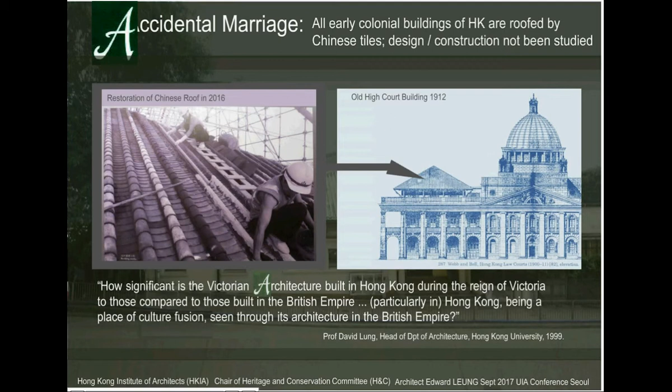As I come across more... yes? Can you define what's a Chinese roof? I am coming to that. I will come to that.

Chinese roof — okay, I'll jump to that. No, that will be the next slide.

When I come across more projects, these are some of the projects that I come across repairing. And look at this, the end tiles sagging. It doesn't happen on Chinese buildings, it doesn't happen on Western buildings, but it happens in Hong Kong a lot, over and over again.

Parapet wall, tiles clashing into it, no flashing. I wouldn't do it in England.

Isn't the point that in British architecture, they're only interested in the facades, the roofscape is really not so important? That is a very good point. The roofscape is all important. That is the central difference.

I will come to the different categories. What you said is one quarter of the question. I will categorize what Western architecture or Western buildings look at — when did they look at the roof, when did they not look at the roof, and what happens when they don't. When they do look at the roof, they look at the shape of the roof, or they look at the techniques of the roof.

So as I said in the beginning, I don't look at buildings at features — that is the layman way of doing it. The layman will bring you on a Hong Kong architecture center tour and say, oh, this building, blah, blah, blah. I never look at buildings like that. I look at it as, what happens if I were the architect 100 years ago? That's how I look at things.

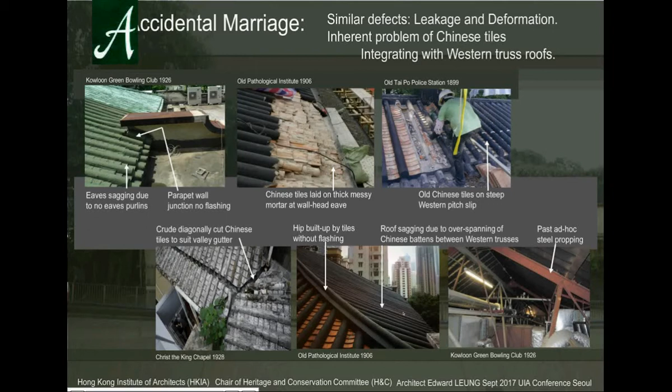Sagging on the roofs, okay? This is just lime mortar without any flashing. In Western architecture, we would put a bonnet tile or a bonnet flashing on top of it. It doesn't happen here, okay? And they sag. Also, the structure has got a problem, because the span does not match the necessary structure. I'm not talking about one building, time and again this happens. So I want to see, is there a rule to it? If we have to accept Hong Kong has these sort of things, why would some people do that? Can we think of some way to resolve it?

Okay, first of all, then we come to Payman's question: what defines a Chinese roof? I want to narrow it down because Chinese roof is such a gigantic topic, it will take me 10 years to do it. I will narrow it down to Lingnan roof. Lingnan being in the southeast coastal region of China, where Hong Kong, Guangdong province, Guangxi province and Fujian province are. What tiles do we use? I don't want to talk about North China tiles, that's a different story. So how do we, Hong Kong in particular, 100 years ago, integrate Chinese roof with Western building? How do we do it? Then, when we face with these things, what are the problems, and do we have good conservation techniques to deal with them?

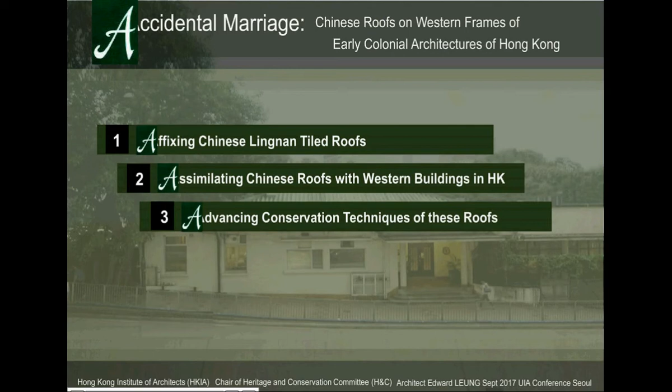Okay, Lingnan roofs, according to Professor Tong Gao Hwa, he cited 5 characteristics of Lingnan roof, which is very particular. One is that we are water shedding. We only need the tiles to, okay, come back to what defines Chinese roof. Chinese roof is defined as, obviously used by Chinese, but the way we do it is modular, concave and convex tiles, small units, very typical units, very few special typical units. That's how we do it. No matter in North China or South China or Eastern China or Western China, we use concave and convex tiles and interplay with it. This is from the scholarly studies of many scholars saying that the common characteristic is convex, concave tiles.

Okay, Western tiles do have typical tiles, but Western tiles also have a lot of non-standard ones which are used widely. They have a lot of bonnet tiles, ridge tiles, cap tiles, eave tiles, parapet tiles, and a lot of flashings. But Chinese tiles predominantly try to use one or two shapes and try to interplay it as many times as possible. Traditionally Chinese have done this very successfully.

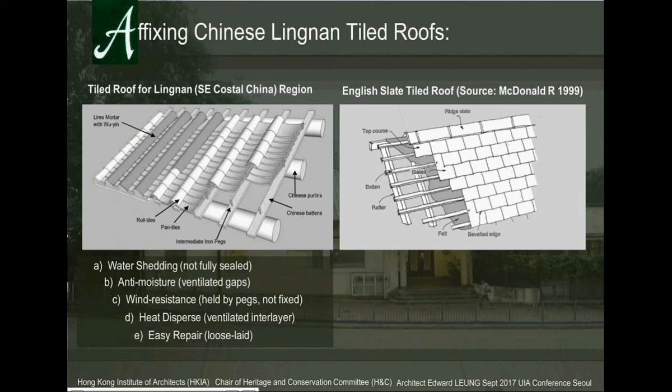As I said, Chinese roofs are something like that: purlins very close together, and very small, thin battens, done in a very gentle roof. Something like that. And the purlins are probably 400 or something apart, and because of the length of the tree, you can probably span 4 or 5 meters. The reason we do things like that is because all Chinese buildings enter on this side.

Chinese buildings will always enter on this side, on the eaves. Western buildings, you always enter on the gable side. That is why on the Chinese building, this does not matter, you can have as many wings as possible. Western buildings need that width because you face front. Chinese buildings don't matter even if you have a lot of columns in between, because it doesn't obstruct you, right?

So Western buildings would have a very strong truss, which is able to put very deep purlins and have very deep rafters, in exchange for very small battens. And that is why Western buildings could do it. Oh, I haven't got that drawing, but I'm trying.

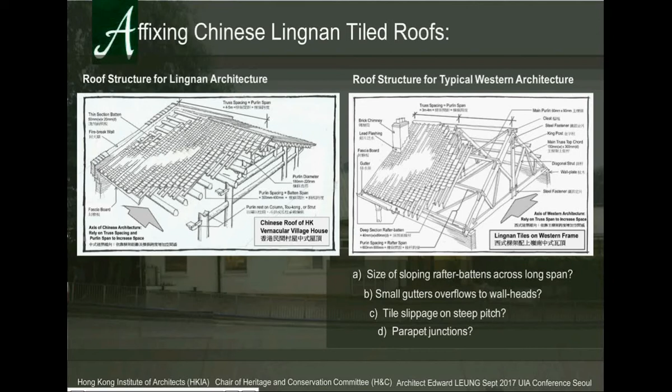This drawing is trying to put Chinese tiles onto there with very closely packed rafters. Obviously, that is expensive, right? I missed one drawing in between, which I've drawn but didn't show. It's with rafters apart, all Western buildings, which was the slide before. Something like that. I've drawn it as well, but I didn't show it.

So you can see the inherent problems of all these things, of how they try to integrate the two things together. But how does it happen? I want to step back a bit. How does it happen? I don't know. When does it happen? I don't know. Because the fact that I don't know is a good piece of information.

Nobody ever writes about it. The more I research on it, nobody ever talks about it. There are some in Shamien, traditional like that, very beautifully designed facade, but the roof is almost non-existent. You can't see it. This one I can see from another building above, and it's setback.

So it must be the same style. Although it's so simple, there's only 8 words in the entire document. This document is very elaborate on the windows and all the materials. Only 8 words about the roof.

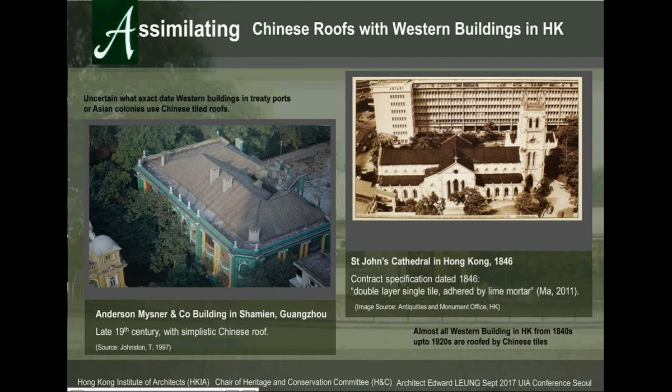It would mean that everybody was doing something like that, a very typical Lingnan double layer tiles roof. Got that? Okay, so I come to a stop on the history.

So I try to look at it differently. What if I were a builder at that time? What would I do? Instead of looking at the style of the building, I reverse it. What circumstances would drive me as a builder to build a Chinese roof on a Western building? I think of four reasons.

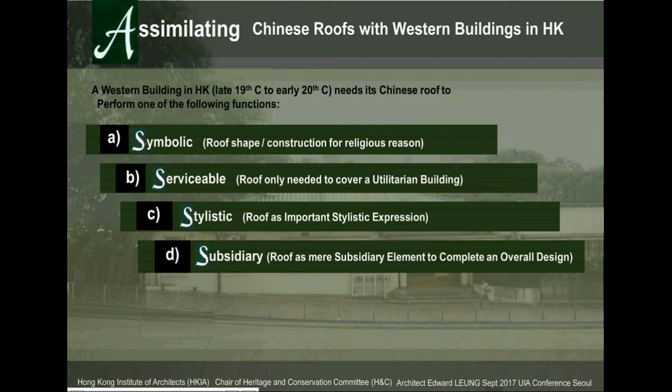One is symbolic, one is serviceability, one is stylistic, one is subsidiary. I'll come to that one by one. Symbolic, not by style, but by shape.

If you have a church, it is important to have a nave and aisles, and externally have a pitch roof. Even later, when you build with concrete, you still want a pitch roof. Somehow with a church, you would want a pitch roof both externally and internally. That is the reason, disregard the style. You can have it classical, like the First Church of Christ. You can have it Gothic, like some other churches. You can have it vernacular. Doesn't matter, always have a pitch roof on the outside and on the inside.

So when you do that, I'm focusing only on tiles, which are important. Later, by the 1920s, people began to use concrete, like Kau Yan Church in 2nd Street, so concrete roof with tiles. There are other churches like that, but I'm focusing on timber ones.

As I already said, the problem to solve with timber truss and Chinese tiles is the spacing of rafters and purlins. So in this case, what they opted for is a very deep rafter, very closely packed together, so that the purlins could be done as if it were a Western truss. It looks like a Western truss, but the rafters are very deep. That is an expensive way of doing it. Maybe the Rosary Parish Church was rich, so that's how they did it.

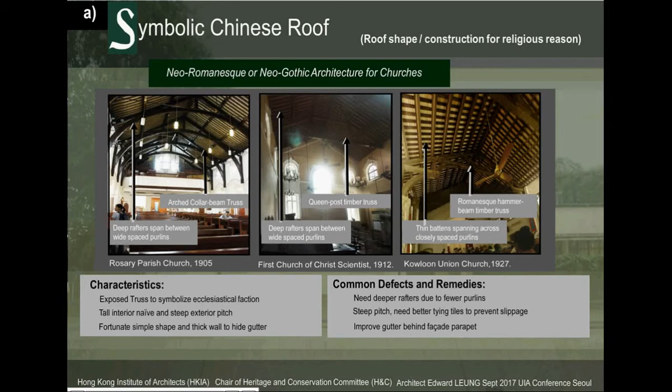You can never do a Western roof without compromise - you either have to pay for deeper purlins, more purlins, or deeper rafters. There's no alternative, no in between. The few cases I see with not very deep trusses and not a lot of purlins always sag. That's the problem.

Okay, the second reason why I would build something like that is utilitarian roofs. Some of them are purely utilitarian. Yes, you may have a facade, but when you have a utilitarian building, you're not particularly concerned about the facade, or you don't need a particularly beautiful interior roof. The pitch roof, Chinese pitch roof, is just for convenience. It's too difficult to make a flat roof, and it's impossible to have a Western slate tile roof because you don't ship Welsh slate to Hong Kong. So you get a roof like that.

But since it's utilitarian, you don't think about the eaves too much, and you just have a cornice eaves, and that's exactly where the problem is. They always overflow, because probably in England, where I come from, it's always drizzling for 360 days a year, but it's never torrential rain. But that is the norm in Hong Kong. So when you have gutters that look like that, you are asking for trouble, Mr. Architect. Sometimes they have gutters which make matters worse - this gutter can never hold the water in a typhoon or black rain. So how do people deal with it?

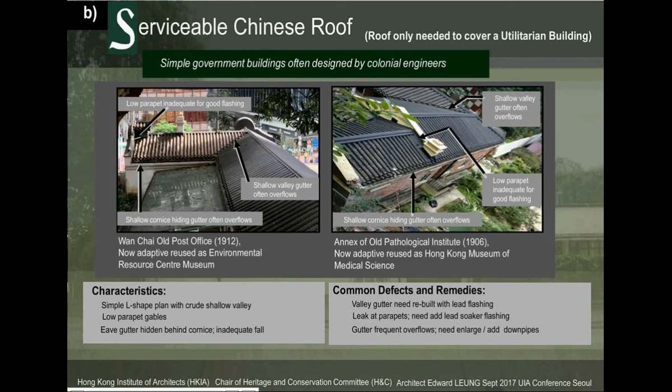The third type is more stylistic. There are occasionally architects who pay a lot of attention to the style of the roof, which I call arts and crafts movement architecture. Arts and crafts is a style that lived very shortly in England, from the late 19th century to around 1910, when it was overtaken by Art Deco and the modern movement. It was a very short-lived style between the Gothic revival and modernism, but they indeed produced a number of very good architecture.

For those of you who studied Western architecture, you know the arts and crafts movement emphasized traditional English handcraft building skills, like making very good Welsh slate tiles, very good hand-hammered flashing, very good hand-cast gutters, and all these sorts of things. The hell it can be done in Hong Kong, I can tell you.

So when someone tried to import this style into Hong Kong, they found they couldn't use Welsh tile and had to use Chinese double pan, double roll tiles instead. They are asking for problems.

I see problems over and over again, clashing tiles, particularly when it is sloping. Imagine it is easy to cut this tile at 45 degrees. But how do you do this? How do you do this? Not possible, I can tell you.

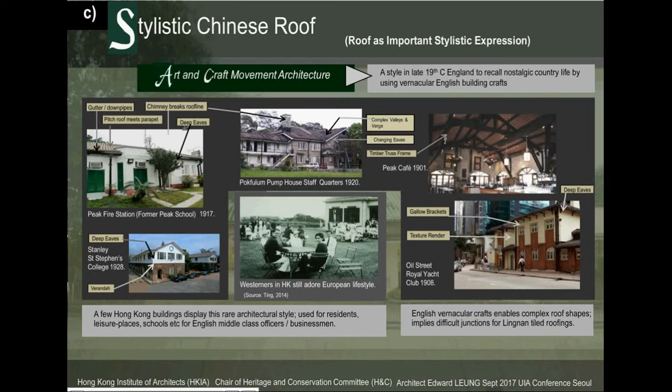It's better for some of them, most of them, because they have deep overhangs. So even if it overflows, it overflows, but it's still not nice. These are a number of common problems I see in this type of building.

So I dealt with two buildings; this is one I didn't deal with but looked at. Again, you can see the issues here. This one is done with lime mortar, with very funny junctions and a very long gutter. When it rains, I can tell the water will just flow down. There are a lot of junctions, a lot of tricky junctions, and this one has cutting at 45 degrees too.

Do you classify these buildings, like Gothic churches and these arts and crafts buildings, as colonial style? Because I think of colonial style as more classical. Yeah, you could, a particular kind of classical. But how do you define colonial style? It's a very broad classification, but generally it's an adaptation to the local climate, so there's some modification on it. Yeah, you could call it colonial style, just that personally I don't use that term a lot, except to simplify it so people understand, because it's too difficult to define.

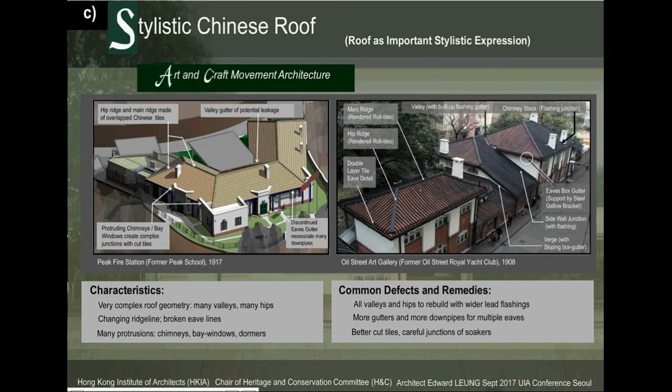Okay, as I've already explained, colonial style is a style, but not strictly a style. It's a method of doing things in colonial areas which combines a transport of styles from the Western mother countries to a colony, with a lot of adaptations. Sometimes it's not pure style, as if it were. Sometimes it mixes a number of styles together, which you would never do in England. So it's hard to say colonial style is a style, I would say.

Okay, the fourth type is the subsidiary type. I call it subsidiary, trying to use the 4 S's to make it more fun. This type of roof has an imposing facade, which is more important. So the Chinese roof will help compose the exterior form, but it's not a predominant aesthetic feature. The form is there, but not the detail of it.

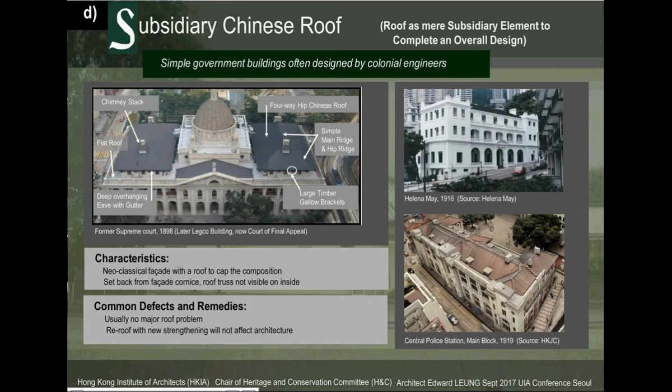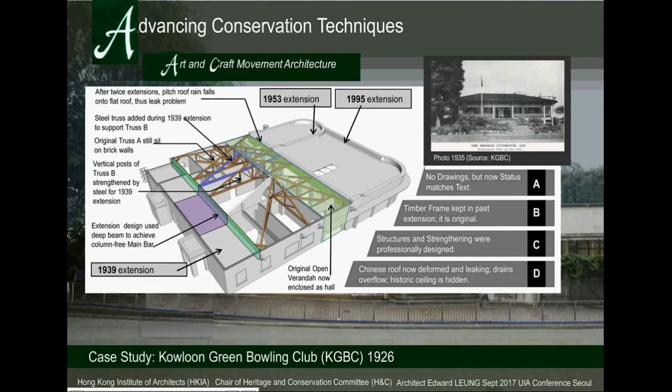So I cover all 4 kinds of roofs, and now come to a case study which I, together with a number of partners including Betty, worked on: the Kowloon Green Bowling Club roof. It has a truss built in 1926 and has been altered a number of times, along with the building. But the main trusses and main roofs are still intact. Obviously the roof tiles have been changed many times, and it sags, leaks, and overflows — all the common problems we see.

As I said, it sags, so it has steel props holding it up. The gutter never works because it overflows in Hong Kong's heavy rain. But the gutter is important — I can't get rid of it because it's an important feature in Arts and Crafts movement architecture. The black line and the black vertical pipes are important features, and obviously there are cracks. As I said, the Arts and Crafts movement juxtaposes white vertical plane lines against the pitched roof, creating junctions the Chinese style can never deal with.

It also sits at the edge because it used to have gallow brackets, and when altered, someone just cut away the gallow bracket. The Chinese batten can never overhang — it's easy for a Western rafter to overhang, but impossible for a Chinese batten because it's too thin. So unless you've got some solution for the overhanging eaves, you can never deal with it.

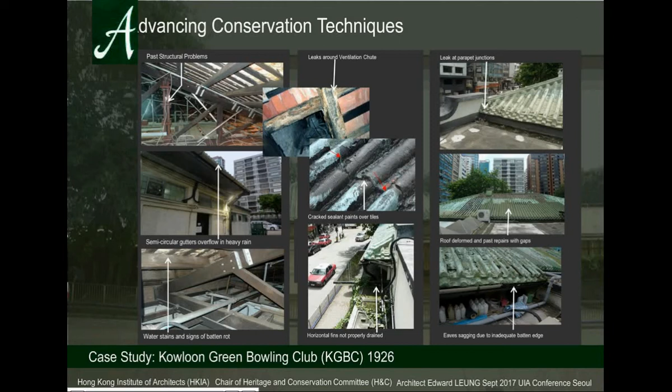These are the problems we faced, so we devised some solutions. We used modern stainless steel packs to hook things together between the two tiles. The beauty of Hong Kong roofs is that we always have double pan, double roll tiles, which means you can hide a lot of things in between that cannot be seen from above or below. We add steel wire and copper wires in between to hang this together, and make sure it ventilates in between, which is an important feature.

As I said at the beginning, a Chinese Lingnan roof must ventilate because of our climate. This one is funny — it's not a thin batten, not a deep rafter, it's in between. The purlins are slightly closer together, but not as close as a Chinese roof, and the battens are thicker than a Chinese batten but not as thick as a rafter. So it's in between these two styles.

And then we had to redo all these flashings. As I said, one of the major problems is when it crosses over a brick wall. A Chinese roof's eaves never need to cross over a brick wall because there's always a purlin and overhangs.

This is Betty, this is my wife Jiang Hong, and they try to lay the tiles themselves. So we have a very good craftsman who teaches us how to lay the tiles. As you can see, we use modern stainless steel packs to do this. And we need to deal with a lot of...

Anybody who knows me knows that I like to hand draw all my details - dealing with the corners, dealing with the gutters. The gutters are never enough, so you have to think of a good way of leading the water away from the building. At the parapets, the usual Chinese way was to use lime mortar to just cement it together, but that's always a problem, so we need to use flashing. And for flashing, because the Chinese tiles are curved, it's not like Western slate wave tiles where you can use a very flat flashing. The Chinese curved tiles make flashing very difficult, so we need to be very careful about this detail.

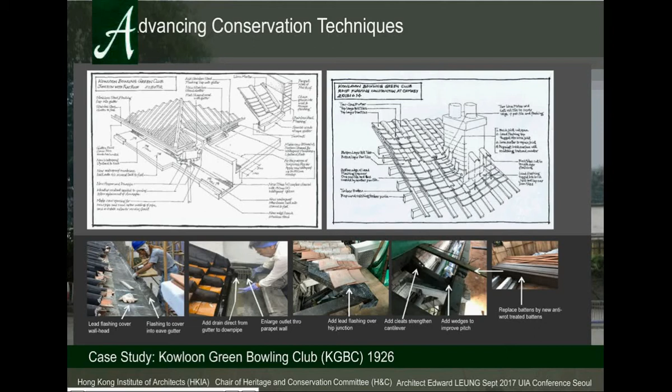If it's a project with money like this one, I will use soaker tiles and not a single layer of tiles. It's important that this part at the parapet is lead flashed, and important that you have proper drainage because it goes onto the flat roof. These are the problems. Then when you have to cut a Chinese tile at 45 degrees, that's always a problem, so you need a flashing across the bottom because Chinese tiles do not have bonded tiles. And overhanging, you need to strengthen the gallow bracket. These are some of the tricks that we need to do.

There are other cases, other projects. This one I didn't do - it's a very good project, the Old High Court building by AST. Also double layer tiles, also using modern packs to do it, and modern waterproofing. This one, Old Tai Po Police Station, also relaying the tiles with modern packs. This one I did, Comix Home Space row house, where I used modern structure, modern screws, modern waterproofing, and modern insulation to do it.

So there are a number of ways to do it. None of them are the final solutions, but as long as we know the principle of what the problems are, we can deal with these things because we are architects. We don't need to be constrained by the past. So the moral of the story is that what has been done in history is not always right, but you need to think of why they did certain things under certain circumstances, and think of an innovative way to deal with these sort of problems.

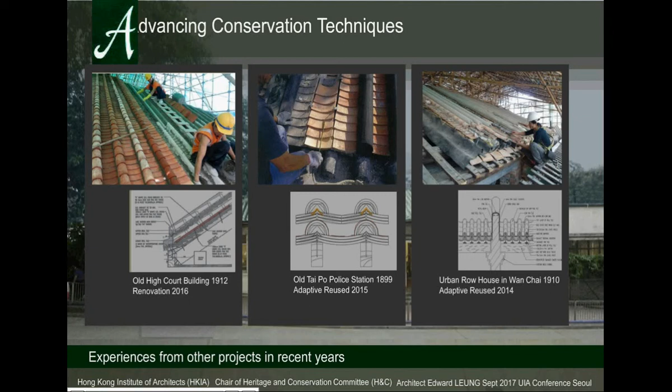Going forward, we need to do more studies and understand - you have to understand both Western architecture and Chinese architecture. With just one knowledge, you can never deal with this kind of group. Carry out more research, and if colleagues, architects, restorers, or conservationists have done these sort of things, collect these from HKIA, HKIA-HKAC, collect all these things, and don't be shy about sharing knowledge. We're very accustomed to hiding all our knowledge under the table so that only I can use it. But I advocate we all share our knowledge so that we gain more knowledge of dealing with this unique set of techniques which is not found anywhere else, so that we can move forward and repair better buildings and do better conservation. Thank you.

Do you have any research on how other Chinese cities handled a similar case? No. I went to Tianjin, I went to Wuhan, other treaty ports with Western buildings. Most of them would use Western tiles, not all of them, some would use real slate tiles. What the hell, how did they do it? A lot of them would use profile clay tiles, Western tiles.

Only from my experience, I don't know, only in Guangzhou, Guangdong province, South Guangdong, Macau, and Hong Kong would Western buildings be covered with a Lingnan double tile, double layer roof. That's the only place I find it. Even in Fujian, I don't see this sort of thing. Why? I don't know.

So it's not about the finance problem, because we used to explain that by the cost. I don't know, it's probably because of convenience. I would say even the church, where we say, oh I write one, and the craftsman will tell him that this is fine, it's perfect, it's good, you know, we can deal with it, and it looks nice, and it doesn't compromise your architecture. It fits perfectly with your architecture, and they will do it. That's how I imagine it, but I cannot prove it.

I kept doing it, but I can't find any documentation. Then we have to go to Singapore to see.

Okay, anything else? If not, then I will go on to the next presentation, right?

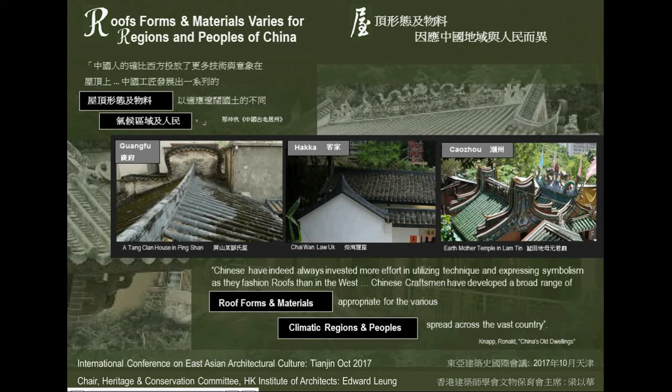The theoretical base is from my wife's teacher, Professor Lu Yuangding. He says vernacular architecture is best expressed in Minxi. Minxi is a difficult word to translate. Many scholars would translate it as sub-ethnic group. I don't like this term because ethnicity carries too heavy an 18th century anthropological burden, which carries connotations of race, blood, and people's expression. It's too heavy. I can't find a better translation at the moment, although I know a lot of people would call it sub-ethnicity, but I would still use Minxi or communities. Please excuse me for using this term. If you see another translation, it's not because I don't know it, it's because I prefer not to use those other terms.

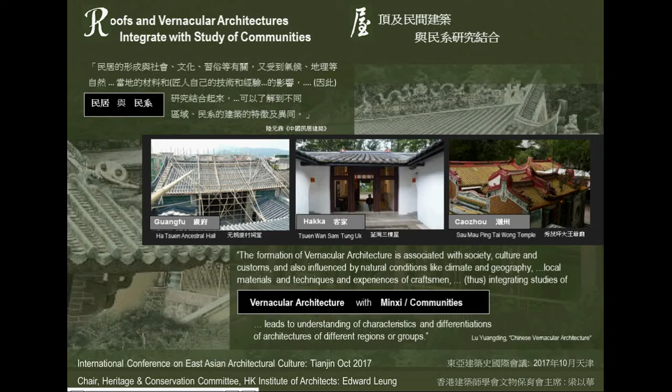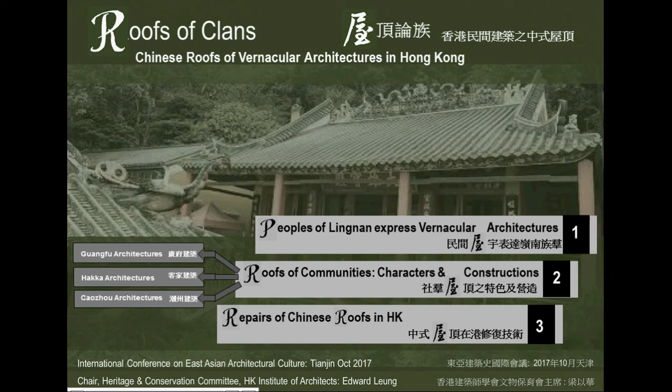So in Hong Kong, there will be 3 types of communities: Guangfu, Hakka, and Caozhou. First I will explain what these peoples are and what types of architecture they have, explain them one by one, and then explain the characteristics and how to repair them.

First of all, in the Lingnan area - this is the Lingnan area. Why is it called Lingnan? It's called south of the ranges, south of the 5 ranges in Ling. These 5 ranges cut across the west of Fujian province, north of Guangdong, north of Guangxi province, south of Jiangxi province, and south of Hunan province. It just cuts through there.

It stops the northern cold weather from entering the south. It also catches the southern coastal humid typhoons, air and rain, bringing them to these areas. It also cuts off all the rivers. All the rivers north of the ranges go into the Yangtze River - every one of them goes into the Yangtze. South of the 5 ranges, all the rivers go into the South China Sea.

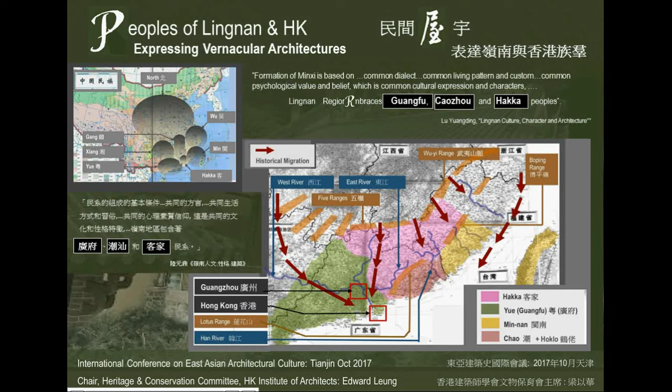So we'll focus on that. All the vernacular studies of Hong Kong I've been doing are focused on these 3 communities, broadly. They came to Hong Kong at different times.

The Guangfu people have been here the longest, so they occupy mostly the fertile plains in Yuen Long, Sha Tin, and Tai Po. The later comers, the Hakka people, came after the evacuation order in the Qing Dynasty, so they could only occupy the hilly areas. That's why the Hakka peoples always have walled villages - they had to defend themselves against the hostile locals.

The Caozhou people, part of the Min dialect group, mostly came later. Some came after the fall of the Qing dynasty in the early Republican era, in the 1910s or 1920s. A lot came after the change of political hands in China in 1949, so many Caozhou people arrived in the 1950s. They settled in the urban areas. That's why different peoples occupy different zones of Hong Kong.

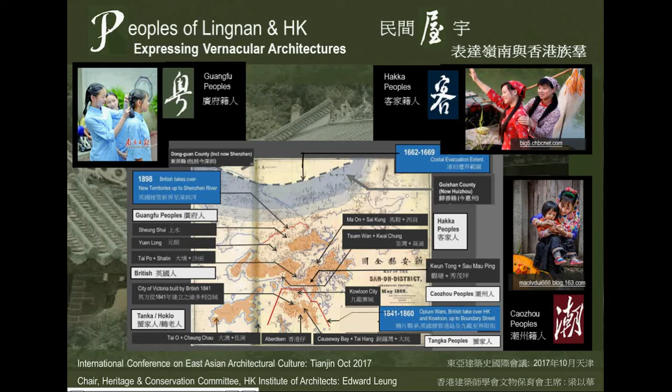So these are 3 different types. The Guangfu people occupy the plains, so they have stable, large clans, and they built a lot of ancestral halls. So they are mostly characterized by these ancestral halls.

The Hakka people have a lot of walled villages because they had to defend themselves from the hostile locals, so many built compound houses. The Caozhou people came in the 1950s to the urban areas, so they no longer needed ancestral halls or defensive houses, but instead built a lot of temples. So these are the different types of buildings we can find in Hong Kong.

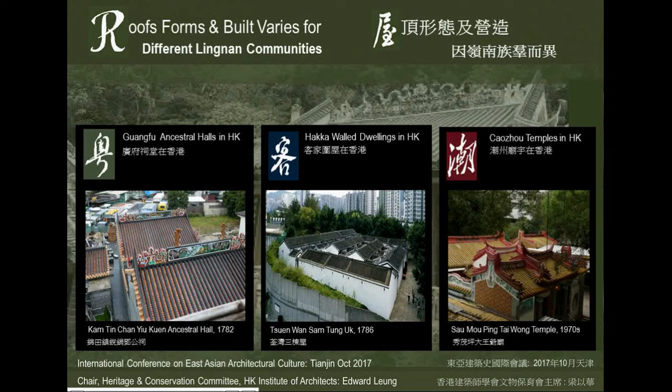It may not be the same case in China, right? But this is a phenomenon of Hong Kong because of its unique history over the last 2 centuries.

You can see the colonnades are always of a lower order than the main halls - symbolically, because they are just for passageways, sometimes for servants living, sometimes for storage. The colonnades are always lower - the ridge of the colonnade is always lower than the eaves of the main hall. That means the roofs do not clash.

You do not need the clashing of the roofs, which is very clever - it makes construction much easier. So you have continuous eaves, which is good. The Guangfu people like to see the eaves beautifully. If you cut across that, it would be less beautiful, right?

So the eaves go beautifully, continuously. The longer the eave you have, the more rich you have, so they don't like to cut it. That's why it's called 三間兩廊.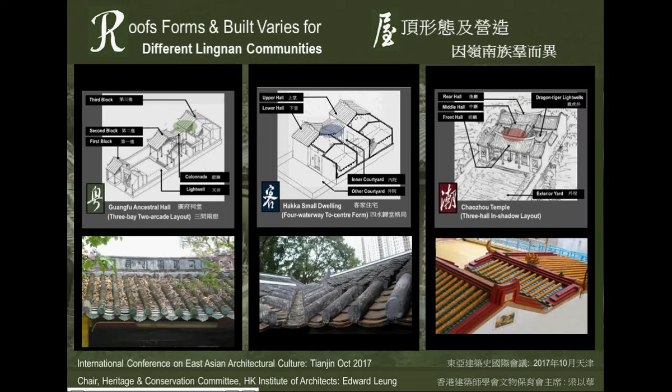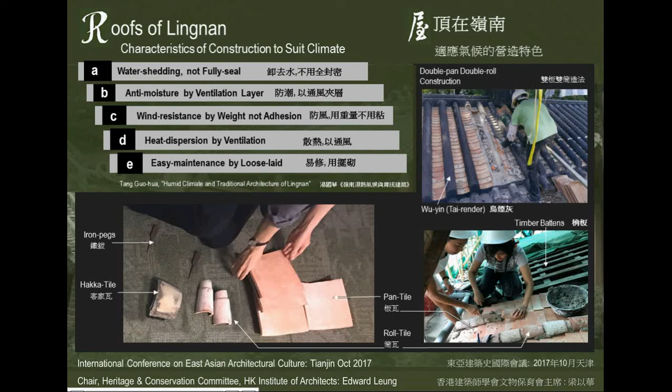So these are a lot of these roofs - I've already explained this one, so I won't go through that again. For Guangfu roof, what they do - I've already explained it - is use pan tiles and roll tiles to cover it, and with pegs, traditional pegs like what I have here, which is a good way of preventing typhoon damage. Just peg them, should be okay.

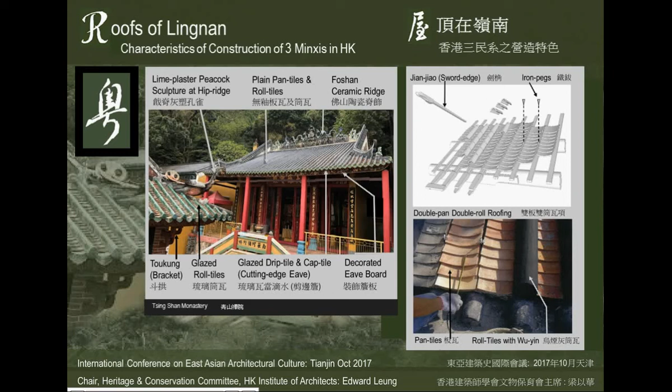Most of them would do plain Wuyin tiles. What is Wuyin? Wuyin is the tar you obtain from the bottom of the Chinese wok. Chinese wok is always black, so they scrape the bottom of the Chinese wok to get this tar. Why do they do it? Because it's oily and it is water repellent. So they mix it together with lime water and it becomes something like that. And sometimes they use glaze tiles.

Hakka tiles, I would have to explain. Where are they? Where am I? Oh, these are Hakka tiles. No, these are not Hakka tiles. I've got enough packets. These - Hakka tiles go something like that. Where are my tiles? Okay.

So instead of Guangfu people using roll tiles, Hakka people use Hakka tiles, which are smaller tiles, something like that - same make, slightly barreled, but in reverse. So they would do something like that to cover it, and at the end they use mortar to stick it together. That's mortar, right? And then cover it like that. That ensures all the water from here goes to the sideway onto the pan tiles and out. That's how they do it.

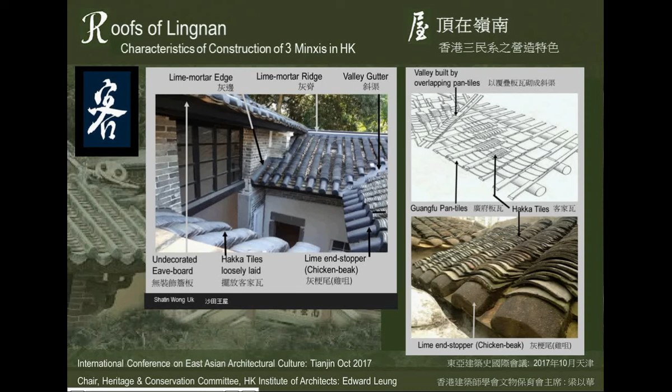In Hong Kong, most of the Chaozhou buildings and Hailufeng buildings are mostly temples, so they would use glazed tiles. Glazed tiles are something that look like that—they don't glaze the whole thing, only part of it. So once you overlap it, you still see the glazed part, but it doesn't matter. How is it done?

The glazed tiles do something like that, and I can do it like that. These are called the drip tiles—they do something like that, and the cap tiles just cover over it. That's how another one would do it, and then the next one, and so on and so forth.

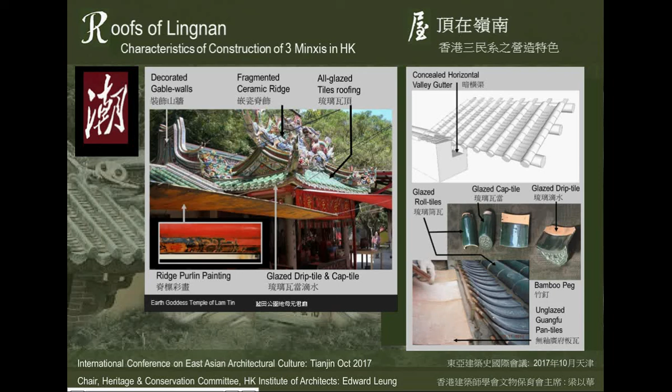A lot of Chaozhou buildings have very important internal gutters, so waterproofing is very important. I can remember the Chinese term as three-hall continuous in shadow. Yam means in shadow—that means when you walk along the central axis of a Guangfu building, you walk across a bay and have a central courtyard, then across another hall and have another central courtyard. Chaozhou buildings don't do that—you walk across in the middle, it's all in shadow, and the light wells are on both sides. That's called three-hall in shadow, and that's why they have gutters in between.

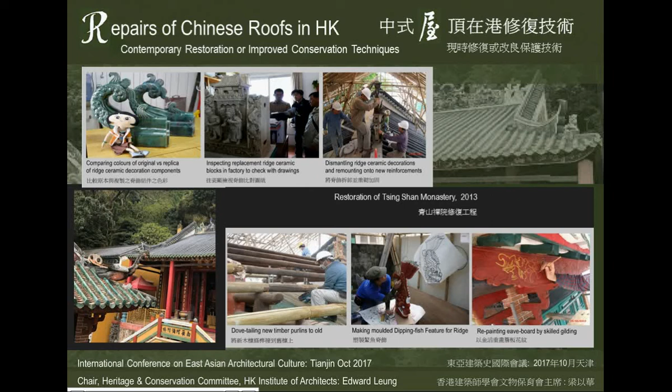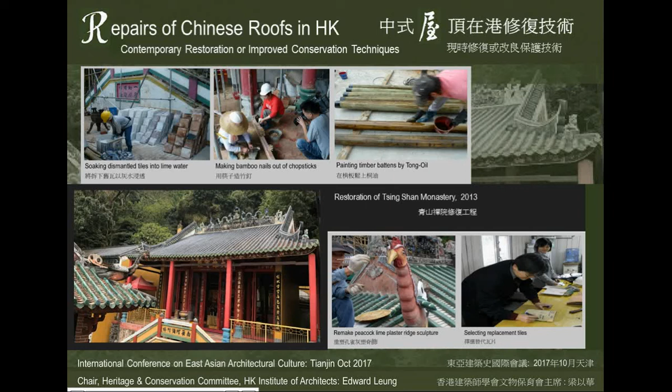For restorations, we need to deal with the glazed tiles, the roof tiles, the truss, the lime mortar, and the building itself, which I'm not going into in depth today. We also need to deal with how to wash the tiles, how to use traditional bamboo pegs, and how to apply tong oil treatment over it—that was your question. Do we treat timber? Yes, we treat them with tong oil. And there's lime plaster decorations, and we choose our tiles carefully.

So what we do is usually have a mock-up to test whether a particular style, particular construction is workable, and also to test the craftsmanship of the workers that we employ.

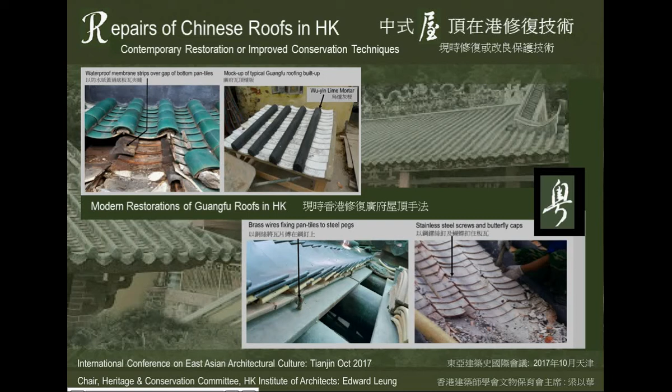We would use pegs, and copper wires to hook the tiles together. For some modern ones, we would use modern stainless steel hooks, because of the shape of the tiles it's very convenient to just put a gap and hook onto it, and it holds together. It doesn't need to hook every single one because they all overlap - you hook every individual one, and the whole thing will hold together.

And for the Hakka ones, as I said, it's important to waterproof this area. I don't quite worry about these middle ones as long as you have a good contractor who doesn't cheat you on the number of tiles. As long as you have a sufficient number of tiles, it doesn't leak. This one is the worry.

So how do they do these edges? Traditionally, you put pan tiles - they will put two layers of pan tiles. But nowadays, very often I would cheat and put a lead flashing in between, just because I don't trust the workmanship.

For the Chaozhou buildings, the most problematic area is the gutter in the middle. Traditionally they would use a very big piece of stone and carve it to make sure the waterproofing is never made of wood. Nowadays, very often, again, I don't trust them, so I would use modern waterproofing to apply onto it.

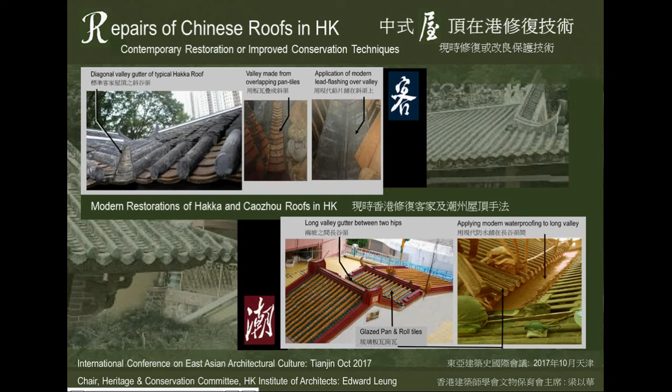And again, there are other cases. This is the case of Mallory Street, a project I did, which is a Chinese roof with a vernacular Chinese style, just that it is a tong lau. What I did is put a stainless steel structure in between, with modern waterproofing and modern thermal insulation. As far as I know, it's the first time ever in Hong Kong that a Chinese roof complies with modern building regulations.

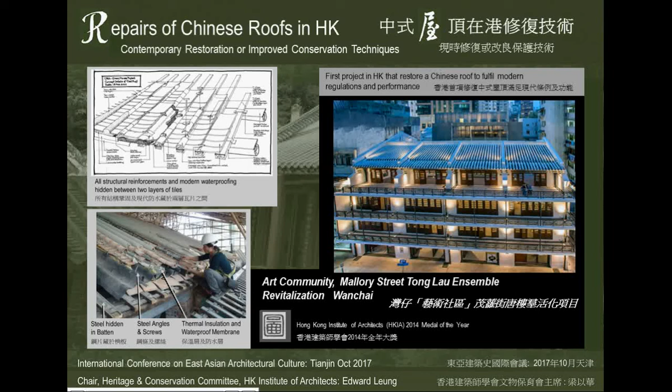So in conclusion, we have to learn all these things because different roofs represent not just technique, but aspiration - they want their roof a particular shape because of different culture, different ideas, and they end up different. Traditionally they have different constructions, and we have to understand these different constructions. A single specification will never work. You have to understand how that particular roof or neighborhood is traditionally done, and repairing it like-for-like is not going to be the answer.

You have to improve it, but in order to improve it, you've got to understand it first, and then integrate it with modern technology to do it. So hopefully, if we continue this kind of study and do more practice of it, and conserve and restore them while respecting their traditional craftsmanship, we can sustain the traditional cultures of the vernacular people and vernacular architecture. Thank you, everyone.